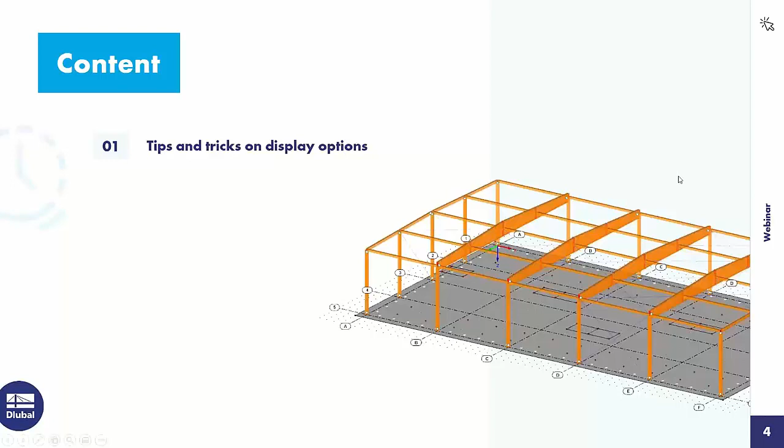To the agenda today: I will introduce some tips and tricks on display options, also on the printout report, and basic information. I will do a single and multiple print of graphics to the printout report. And I show how to create a verifiable printout report. We turn directly to the program.

In RFEM, that's a storage building made of timber and a reinforced concrete floor slab, with bracings from steel, as you can see around it. The model is completed and designed; the timber structure is designed, and also the concrete structure.

We can go through the load cases: self-weight with roof loads and single loads from racks, snow load, the imposed loads with loads from forklifts and from the racks, wind in X direction and Y direction, imperfections in X direction and Y direction, pre-stress, and then there are a lot of load combinations that are automatically created by the program.

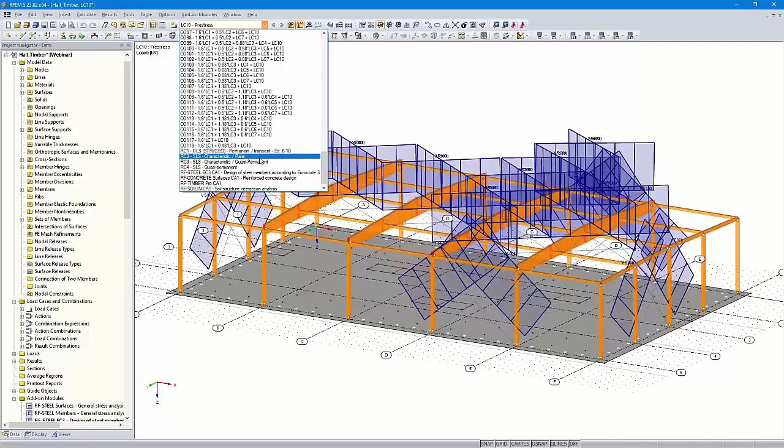Also four result combinations: one for the ultimate limit state design, three for the serviceability limit state design. Then the design of the steel structure, those are only the bracings. You can see a design ratio of 55%. Then the concrete results, also for the floor slab.

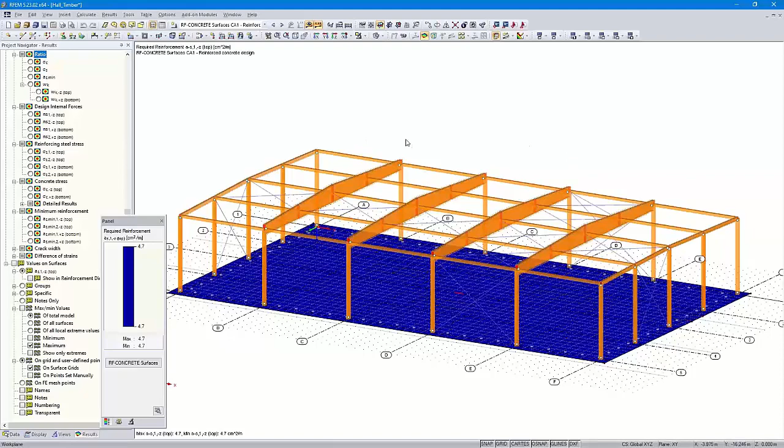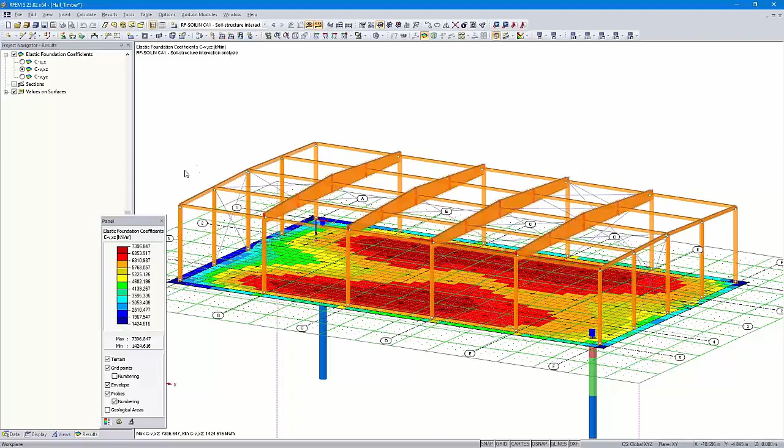Then the results of the timber design. Here you can see a design ratio of 94%. That's in the horizontal beam here, the maximum design ratio. Then I used RF-SOILIN to determine the elastic foundation coefficients. But we want to start with the member results. We want to print them in the printout report.

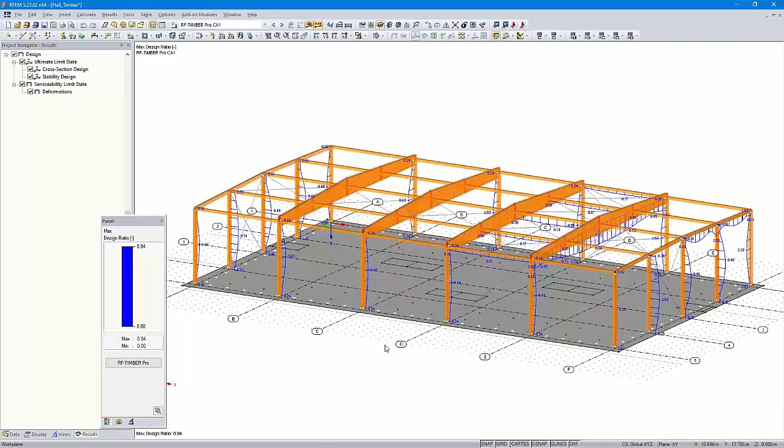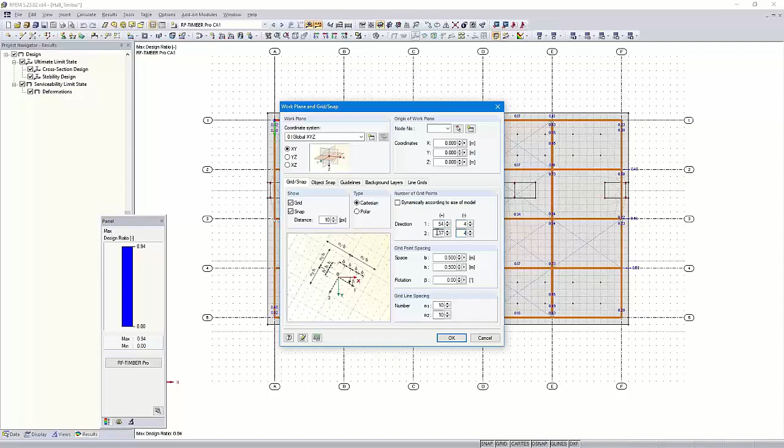But at first, I would like to move the axis designations closer to the model. I can show you how to do that in the side view. We go here with a right click in the grid options, edit. And here "dynamically according to size of model" is checked. We uncheck it and then I subtract 5. Okay, and then you can see the axis designations are closer to the model.

You can also hide the axis in the Display navigator under guide objects, and then you can uncheck the line grids and the axis would be hidden, but we would like to show them and document them.

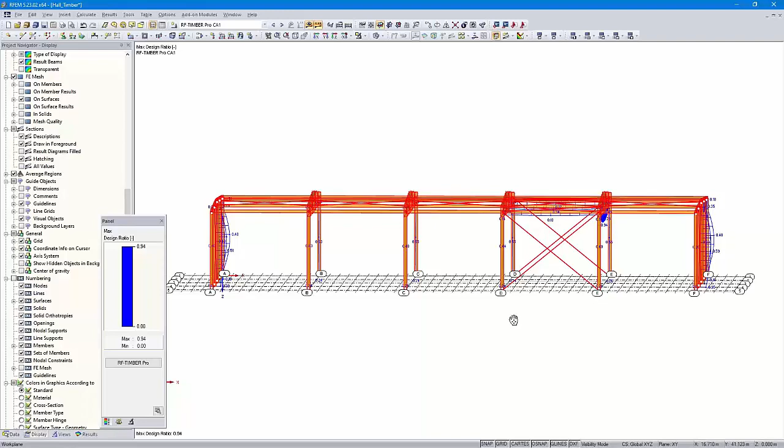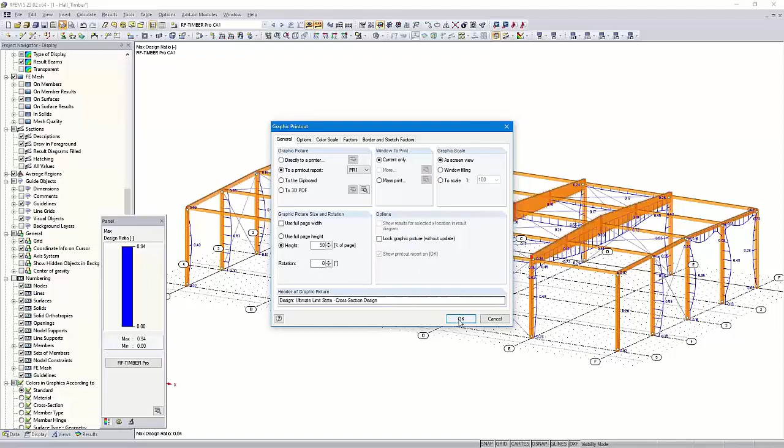Then I make only the timber structure and the steel structure visible with the option visibility by selected objects, and the concrete floor slab is hidden. Let's print that graphic in the printout report. Here above, print graphic to the printout report, the current one only as screen view, those are the options I will use. Then the height, 50% of the page, no rotation, and I confirm that.

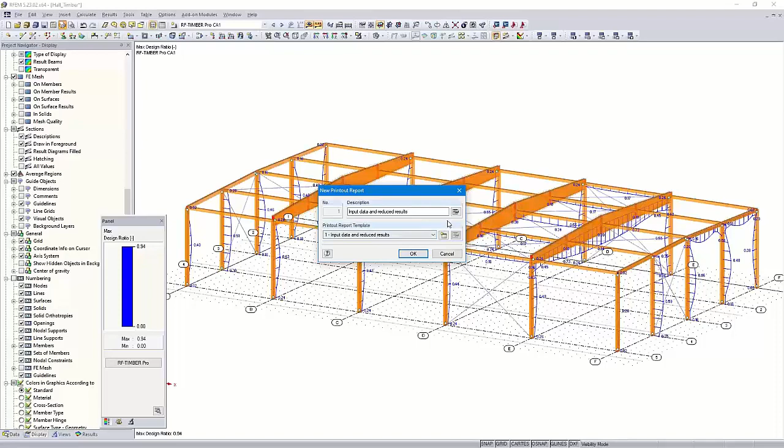Usually we would print the graphic with this option here for the printout report, input data and reduced results. But you can also use other options. In this case, I would like to disable a lot of pages because we want to print the graphics first in a protocol without so many pages, and therefore I disable the RFEM data and the RF-STEEL data. I leave the concrete and timber data because we would like to print graphics in those chapters.

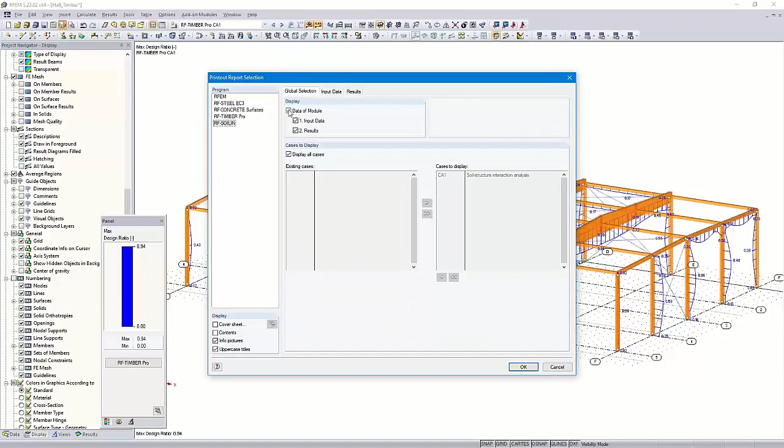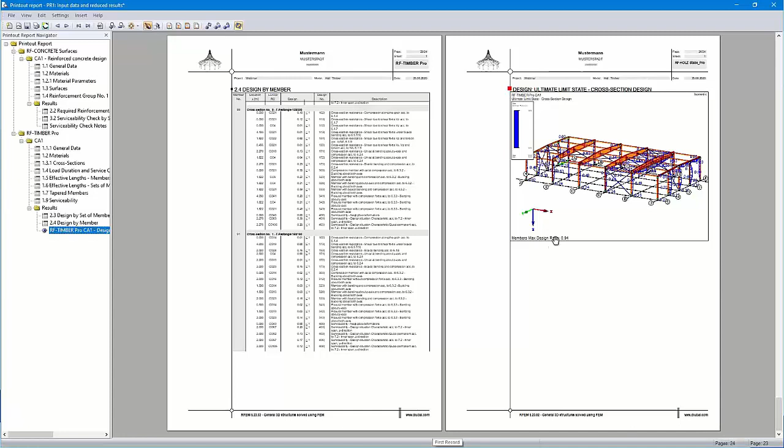So now a printout report with only a few pages is created. At the end, we will have more than 170 pages. Now there are only 24, and the handling of the graphics is much better.

We can see that graphic is quite confusing, but we can modify it afterwards. By right click, I can open the properties and rotate the graphic. First I use the full page height and rotate the graphic 90 degrees. Quite better, but I'm not satisfied with this graphic. I will change it here with right click and edit.

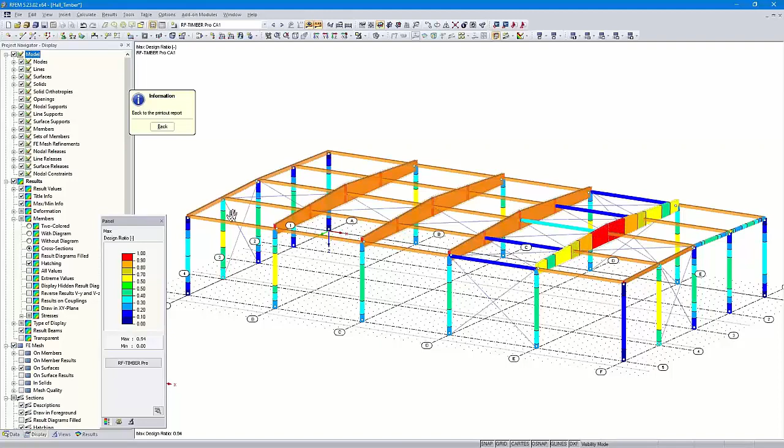I go back to RFEM, and then in the Display navigator under results, members, I can use the option two-colored, that's the current state. Then with diagram, it's colored here. Then without diagram, and cross-sections. I think that's a good overview. You can see the maximum design ratio is in the horizontal beam here, and I can go back to the printout report.

Okay, that graphic is much better. We will use it, and we would like to print that graphic of axis E separately in the printout report. We leave the printout report with saving that graphic.

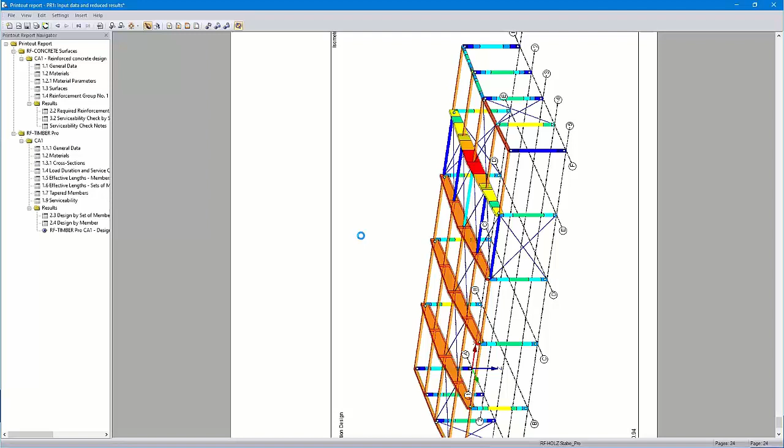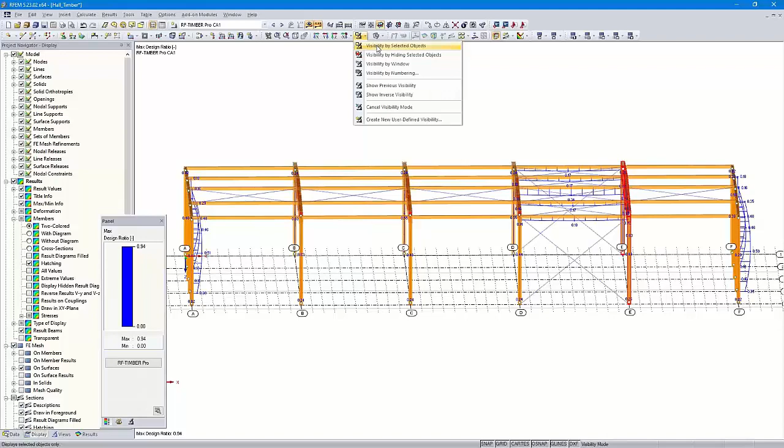Then I create a new visibility. I use this option here, same as when I click on the right mouse key, visibility by selected objects. I use the wireframe display mode, and we can create a view.

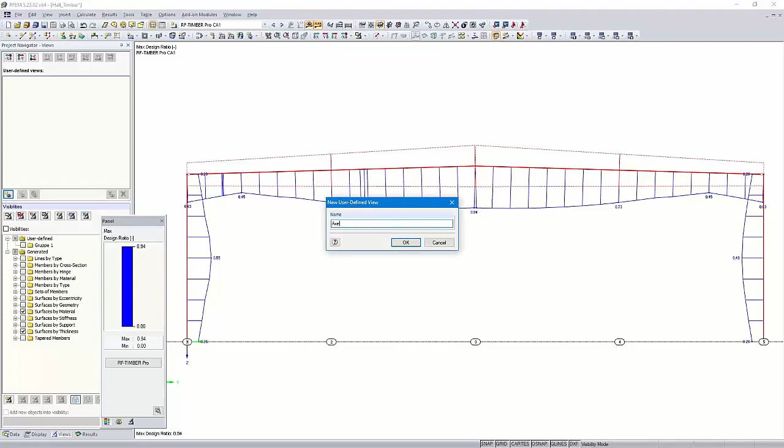For example, here, create a new user-defined view. I can call it axis E. You can go back easily later to this graphic. I'll show you: I cancel the visibility mode, for example this view, and I click here to axis E and come back to this graphic.

Okay, here you can see the 94% design ratio. We printed the graphic - that's quite easy now.

Now that graphic is created too. It's quite sufficient. I could make the panel smaller here with properties.

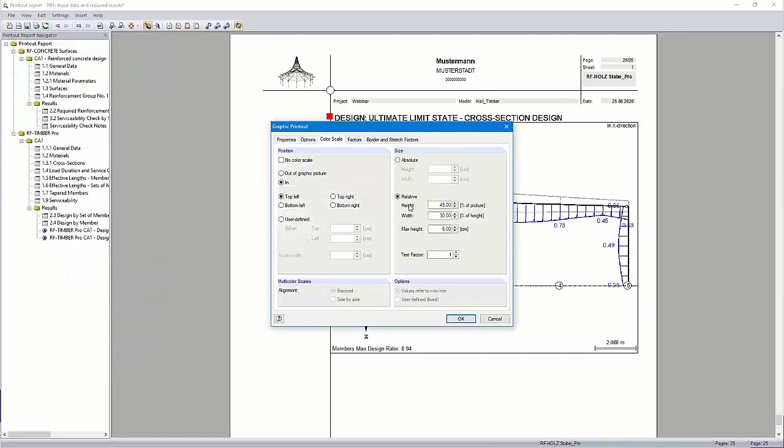I can use a color scale and width of 20 on 20%. Okay, that looks better. I could move that to the right side a little bit, but I won't. We leave the protocol with saving the graphics.

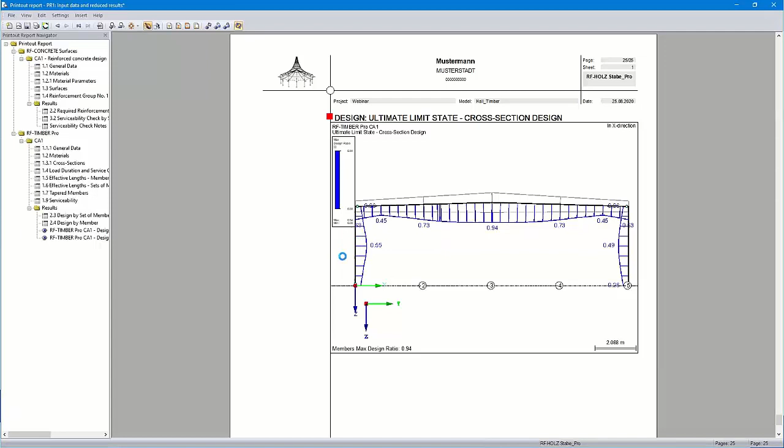And then we print the reinforcement results. I choose only the concrete floor slab in the view.

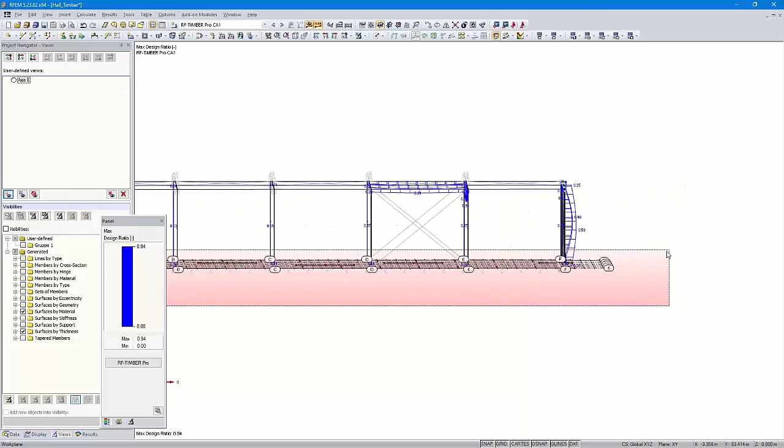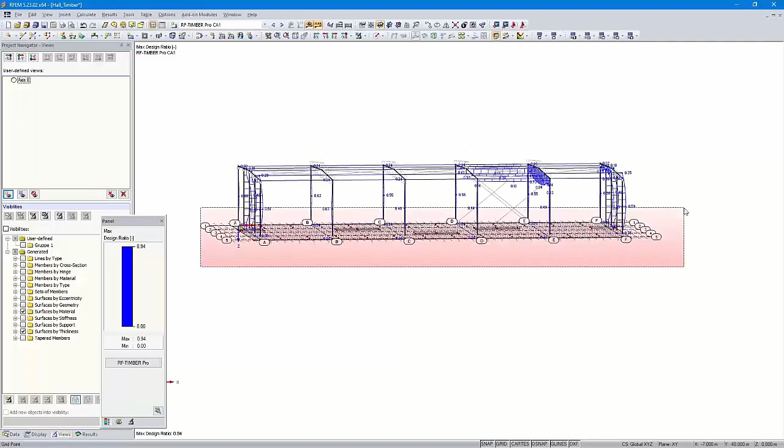Just a moment. A view in Z direction.

A small tip: when you zoom in and out in a graphic with the mouse wheel, you can see steps. If you want to zoom in and out without steps, you can press the Shift key and the middle mouse key, then move the mouse back and forward, and you can zoom in and out continuously. Okay, just a small tip.

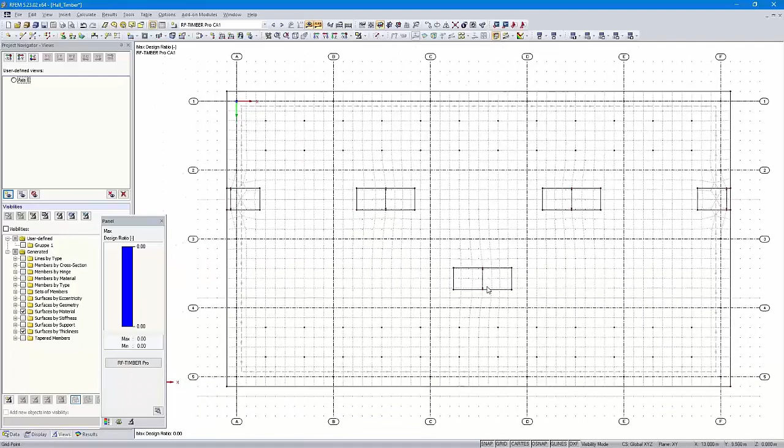Then we go to concrete surfaces and the results. Those are the right results, governing ultimate limit state and serviceability limit state. You can see there are almost the same values in the concrete floor slab because of the restrained design.

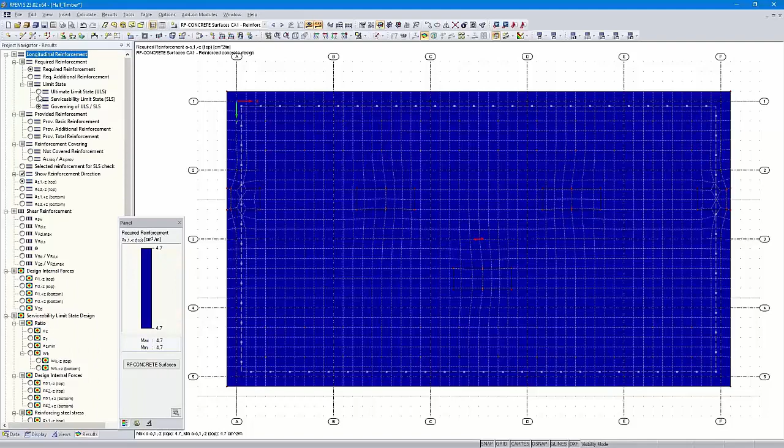I use in this webinar the graphic of the ultimate limit state design. This graphic has more different values. You can see here the values between 0 and 2.7, and 0 and 2.8. Those graphics are more informative.

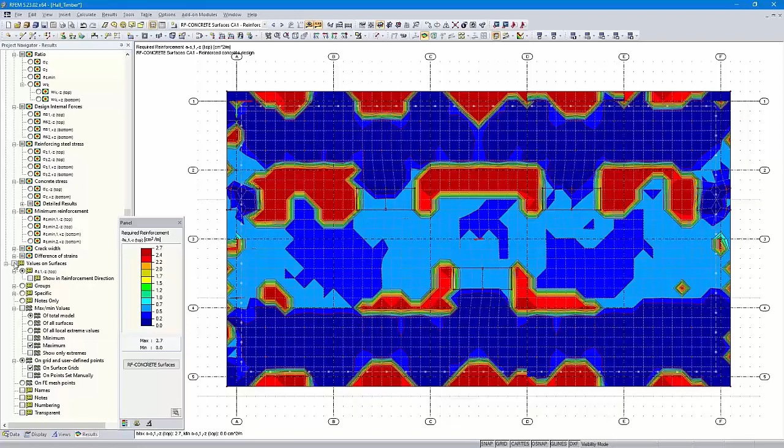Okay, I could print that graphic - that would be absolutely sufficient. But I would like to do a task that is more difficult: I would like to print a graphic with all values in all grid points. I check here values on surfaces, on grid and user-defined points.

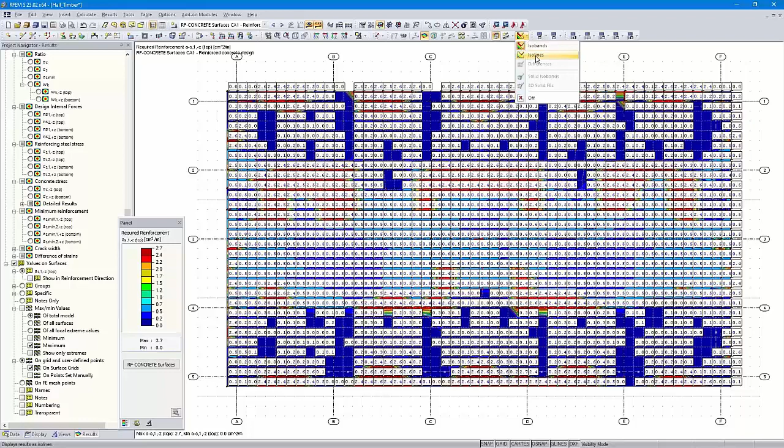And when I have got all values here, I can use not the isobands, but the isolines. Then I test the print - I print the graphic. I use the full page height and rotate it 90 degrees, and we will see how it looks.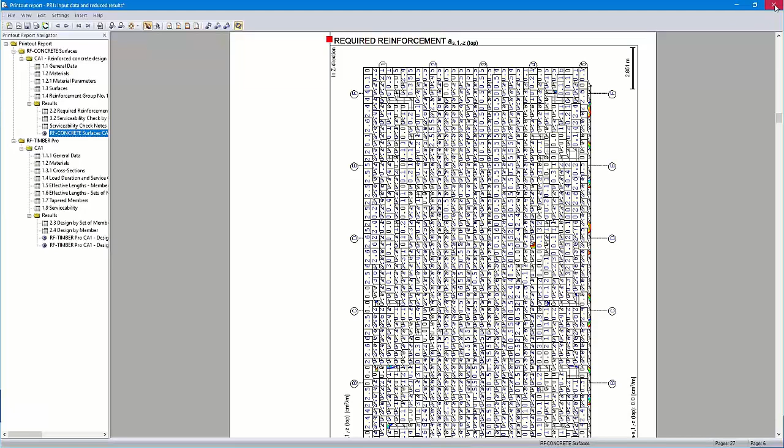Now we can see the values are too large. The graphic is quite confusing, and we leave the protocol without saving.

By right-clicking at one value, we can open the display properties, and we are at the right place here: result values on surfaces. We can change the settings here separately for the screen and the printout report, but we can also use identical settings for both. We change only the setting for the printout report.

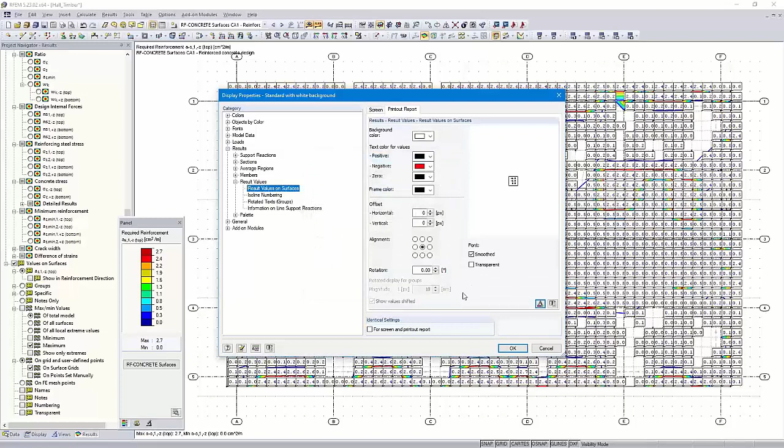I use the black color for the values here. Then I delete the arrow here, move the values to the middle of the grid point, and change the font size to 4. That's in German because my Windows is in German, but it doesn't matter. So, okay.

And then we print it again with the same settings. Just a moment, and then we will see that it looks much better now.

Yeah, now we can read all the values here. At least for a PDF print, it would be absolutely okay.

Then we leave the printout report, because I would like to show you a mass print only for 4 pages for the 2 directions here, and for the top and bottom, meaning the reinforcement. I go here to print again and choose mass print.

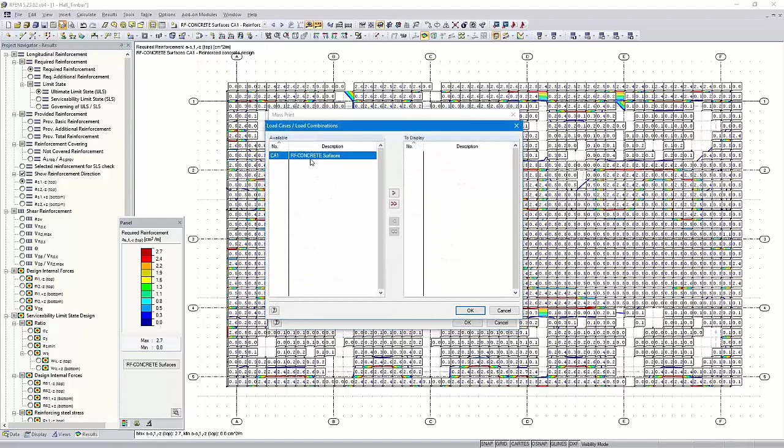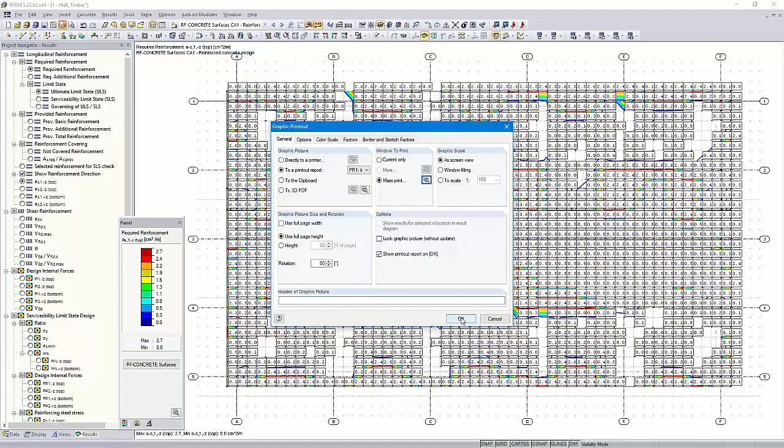I change the mass print settings and select the concrete surfaces, module data, choose ultimate limit state design and AS1, AS2 for the top and both for the bottom. I could also add other graphics, but for this example 4 pages or 4 graphics are sufficient. You can do the same way if you want to print more graphics.

The mass print works for member graphics or graphics with member results as well, but I would like to show you the function for the surface results. Okay, just a moment, and then all graphics are visible.

I click our graphics here. You can see it's okay.

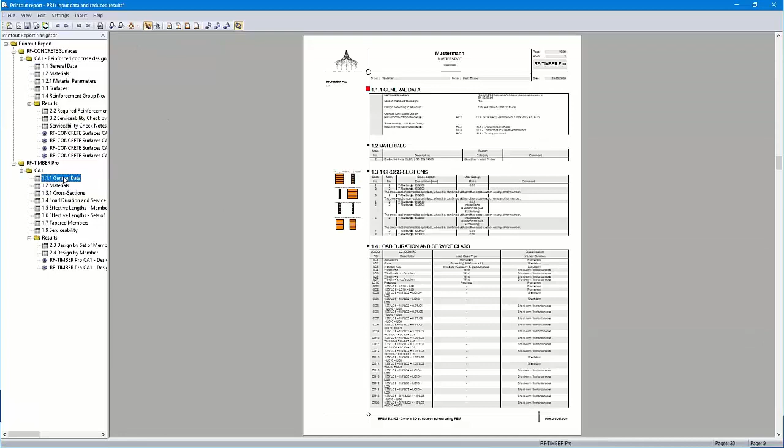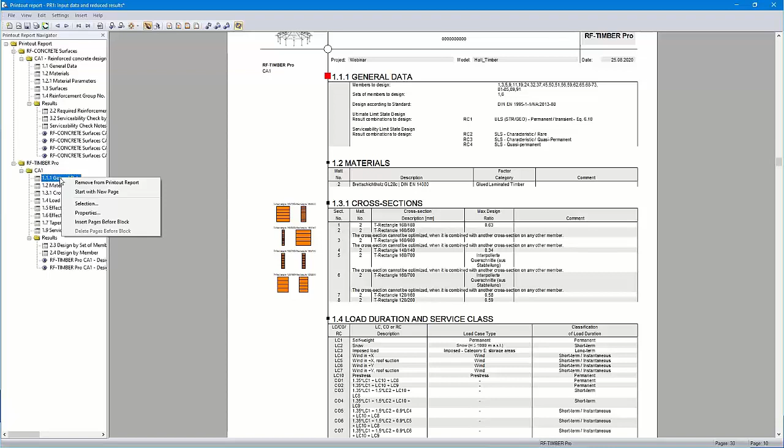Okay, a small tip. For example, if you want to add comments, etc., here in the left column, you can click with the right mouse, then properties, and you can add text. For example, design notes.

Just an example. Here you can see it. Just a small tip. Okay, then some basics.

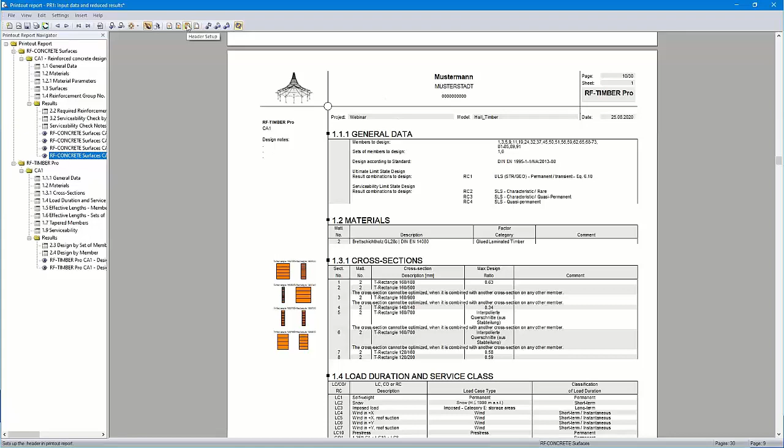For example, we can create a header by clicking here, header setup. We can open the library and create a new header. I already created a Dlubal header with the name of our company, the address, and the logo.

You can change the first number of the protocol, for example. Here in the settings, you can add prefixes, etc.

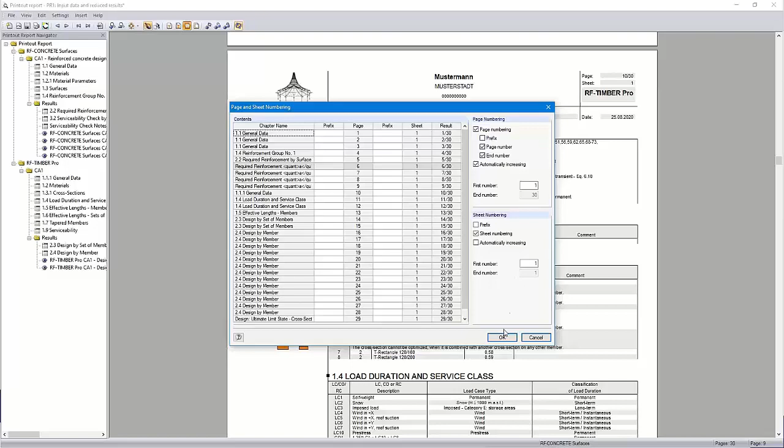So the header should be okay now. Yes, okay. Then we create a cover sheet, here with cover setup. You can also show the picture of the model automatically.

I can add some text here. I prepared the text, it's only fictive text. But we would like to do the printout report complete. Okay.

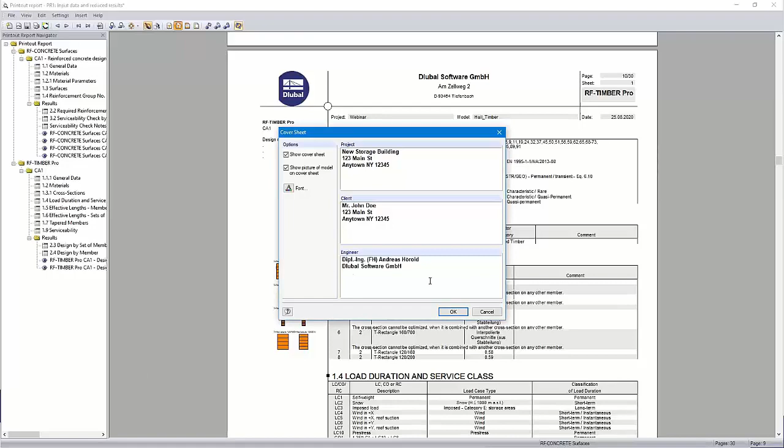That's the cover. Okay, you can see that takes not much time. We can go to the next point.

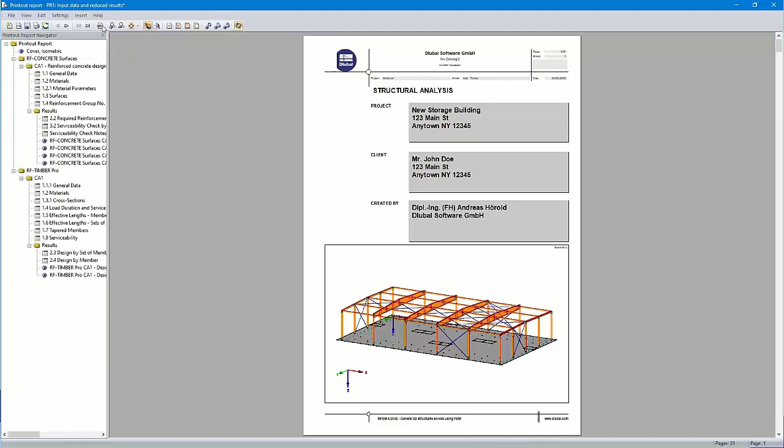You can insert text blocks, text files, images. Now I will add a text block, here the preliminary notes.

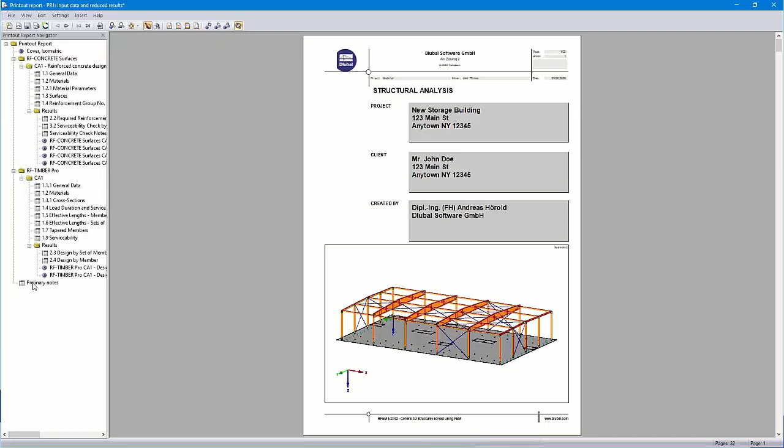I have prepared some dummy text. Only the first sentence is correct, the rest is dummy text. It will be added at the end of the protocol, but we can move that later to the right place.

I will add an image from the clipboard. I go to our website, and here under solutions you can find the online services, for example the GeoZone tool, cross-section properties, the glossary. I think some of you know that tool already. It's for free. We have a lot of international standards, also the Eurocode with the national annexes.

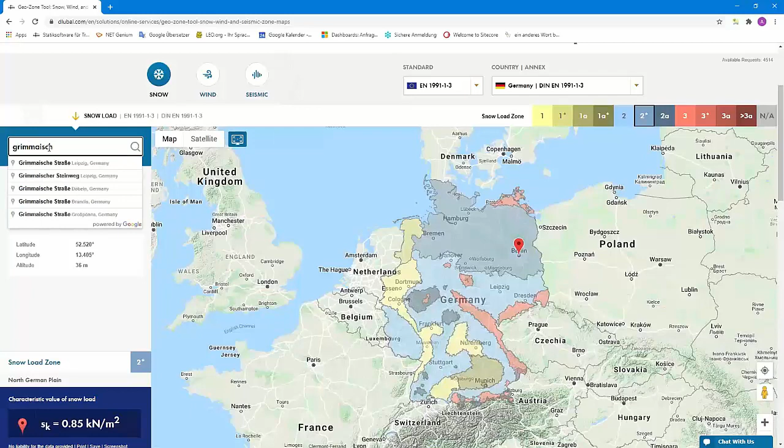I use Germany here. I entered the address of our office in Leipzig. Okay. And we can see here snow load zone 2 and the characteristic value of the snow load.

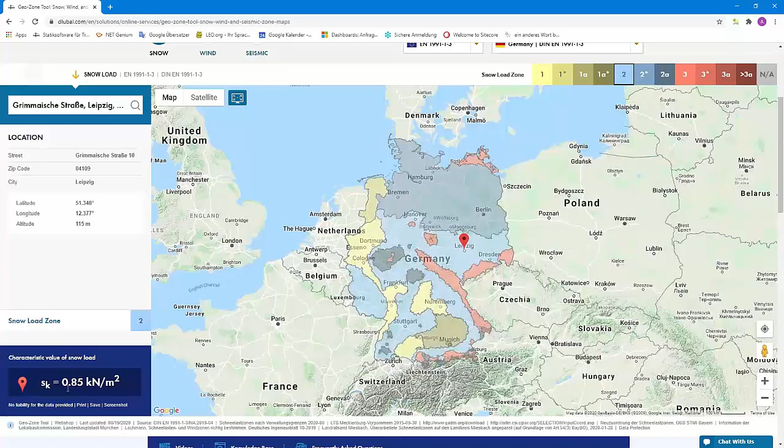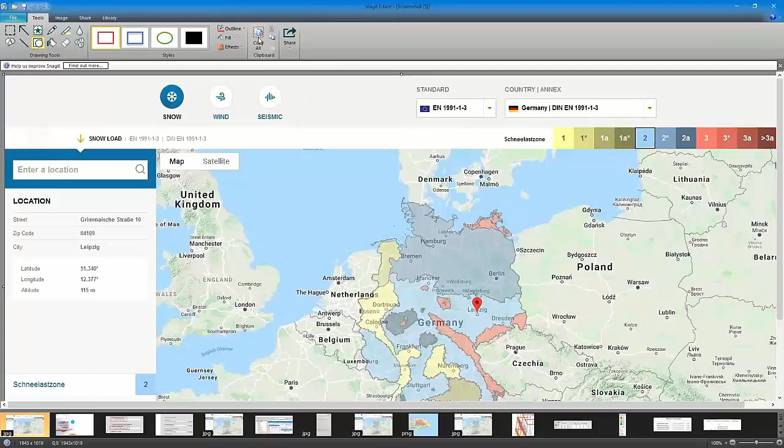And we can create a screenshot, then open it with an image tool. For me, that is Snagit. I can copy it to the clipboard and then insert it into the protocol.

I call it snow load zone. Okay, and you could do the same with the wind loads, earthquake load zones, and so on, and also other graphics. Okay, in the next step, or some other tip now again.

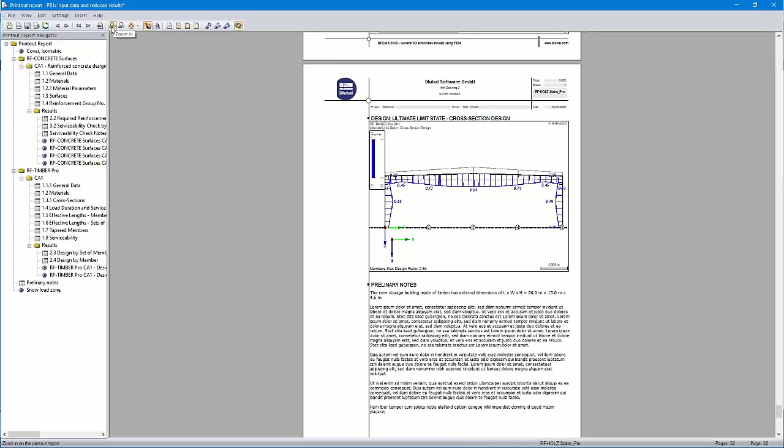You can add empty pages here.

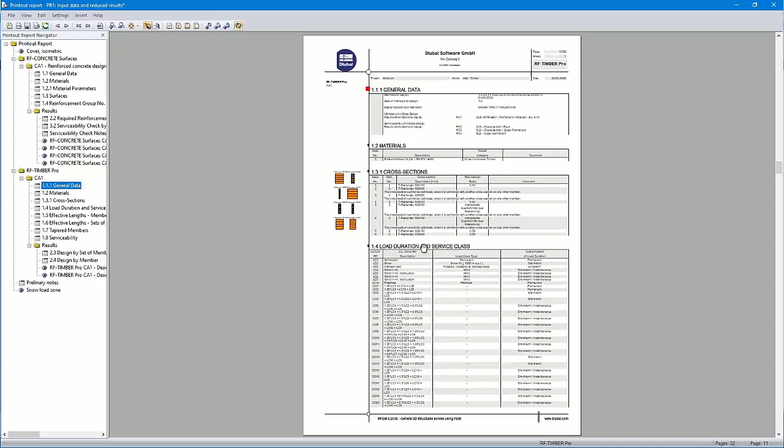For example, you would like to add pages from external programs, etc., in your protocol. And then you see here, that is page number 11.

And by right click I can insert pages before the block. I call it test, and 5 pages. Okay.

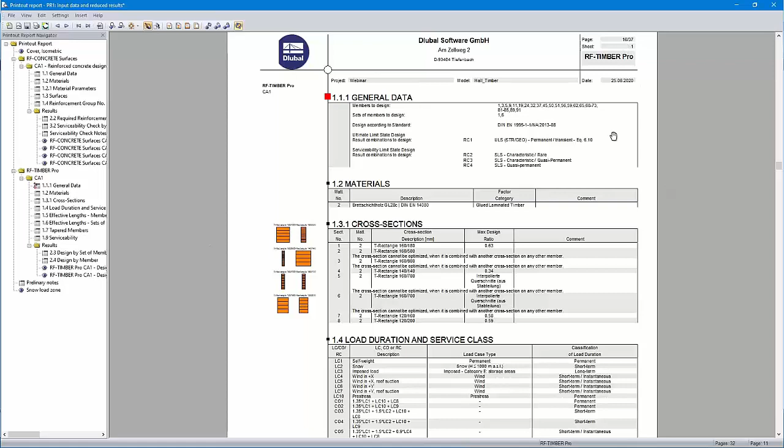And then you can see it's page 16, and this page is page 11. Oh, but I will delete them.

Okay, just for info. Now it's page 11 again. And the next step is to select the topics.

First I check contents here. We would like to show the content. Then the RFEM data, I choose them. The steel data, those are already in the protocol.

Okay, now you can use the settings which you like. Yeah, you can disable some content. For example, I will disable here the results of the load cases and load combinations.

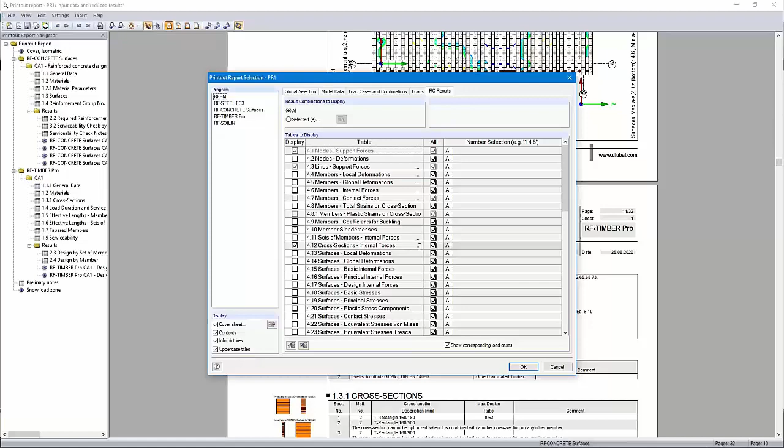And I use another setting for the cross-section internal forces. I choose here not the partition values, but the extreme values of the cross-sections. Okay.

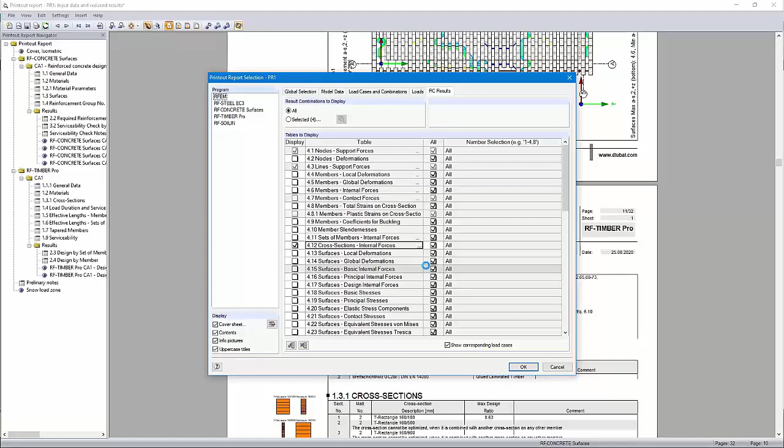Therefore, the protocol will not have too many pages. Okay, then the whole protocol is created in a few seconds.

So you can see all the module data. I moved the preliminary notes to the beginning.

Just a moment. You can see now we have 170 pages. So I move it behind the contents.

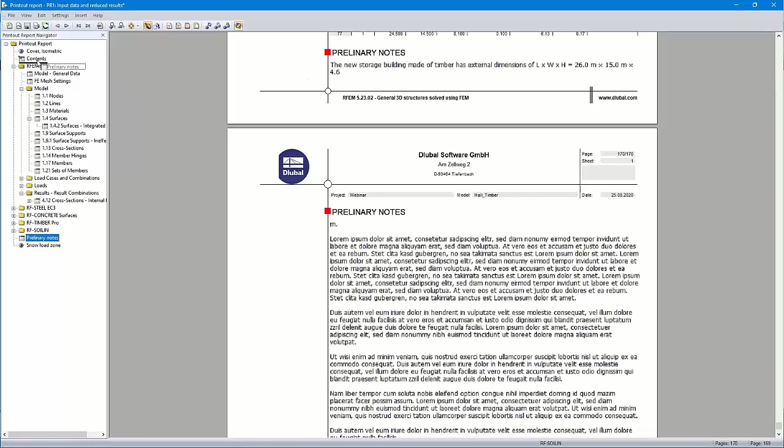Okay, now our pages will be renumbered. It takes some time. So, and I moved this load graphic here into that chapter. I have to wait some seconds. Okay.

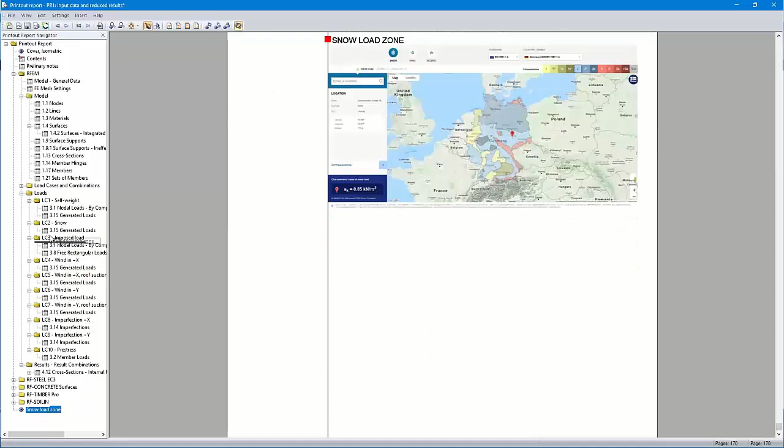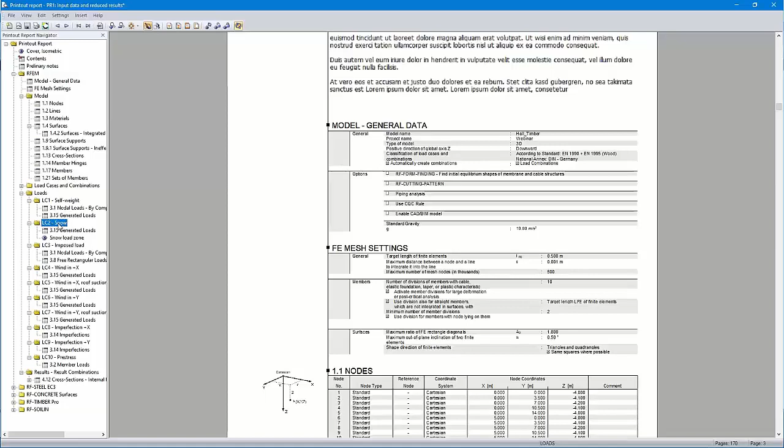So we jump to the preliminary notes. The cover sheet, the contents, preliminary notes, and the RFEM data are shown. Here, snow, the generated snow loads, and the graphic from the Dlubal homepage.

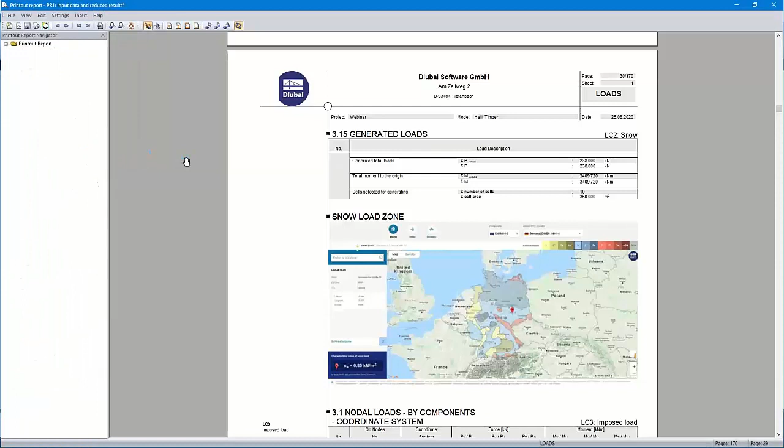It's possible to translate the protocol. There are 13 languages available: German, French, Italian, Russian, Chinese, etc. By clicking here to French, the whole protocol will be translated in a few seconds. You can see here the text is already in French.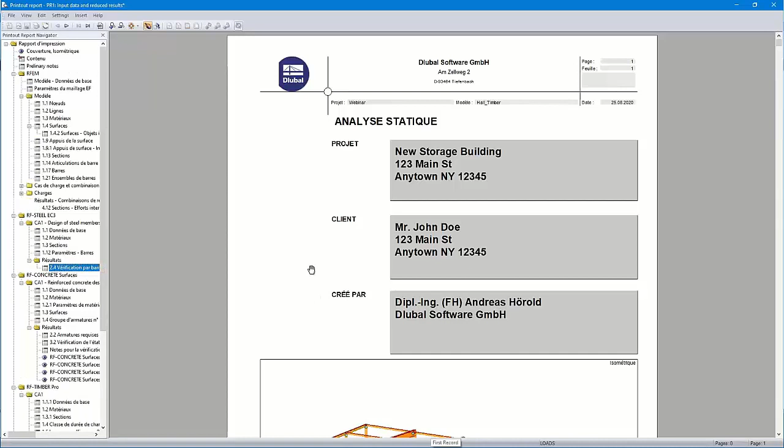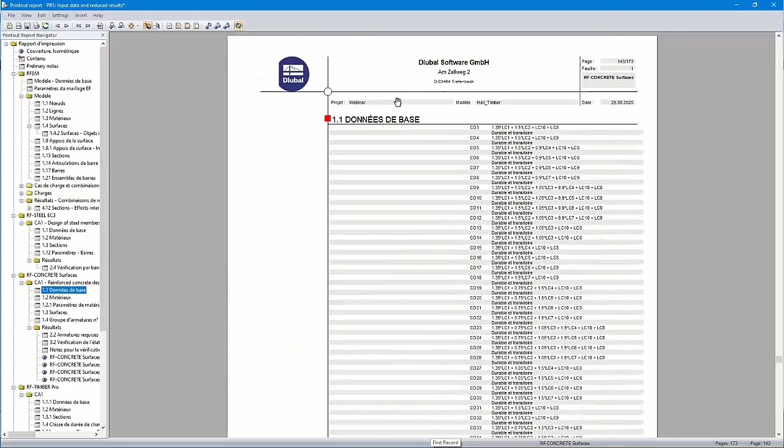Okay, we have to wait some seconds. I will show you some other parts. Here, the whole protocol is now in French. We translate it back. Okay, that will take some time.

You can export the printout report to VCmaster, for example. How to do that, I would like to show you with the help of a knowledge base article. Sandy Matula wrote this article, and she also did a short video where you can see how it works.

You can also print the printout report as a PDF, on my printer, for example. I can show you file, export to PDF, export to RTF - that's a text file. You can print it directly to a printer, also to a PDF printer.

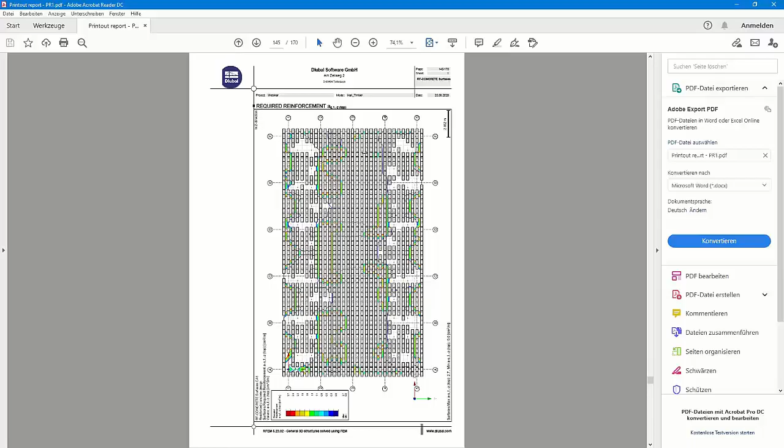I can start it, it would take some time. I cancel it and show you the complete report instead. That's the PDF, you can see the graphic here. It looks quite good. That's the whole printout report as a PDF file.

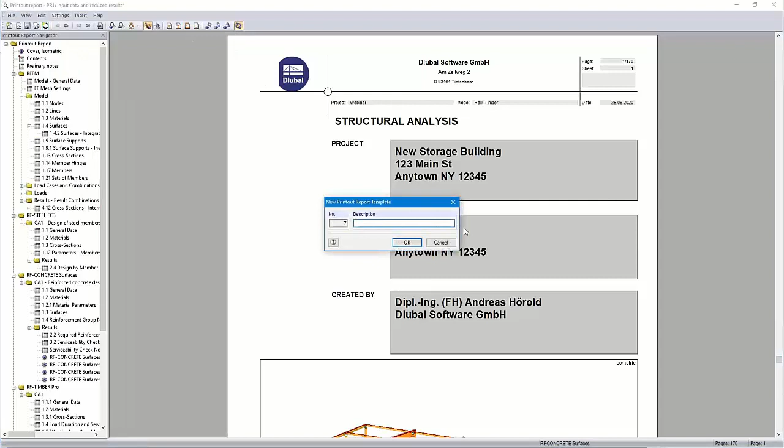Another tip: you can save printout report templates. For example, you can use those settings here for a new template. Then you need to choose new from current printout report, and then you can enter a name and save it. You can also save a new template. You can check and uncheck the chapters that you want to display.

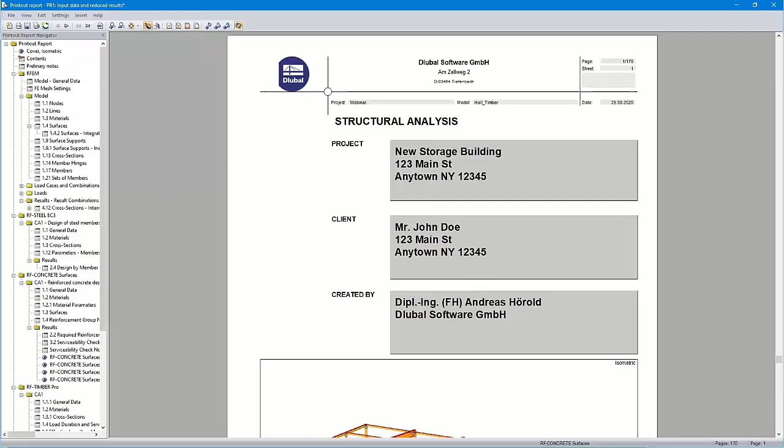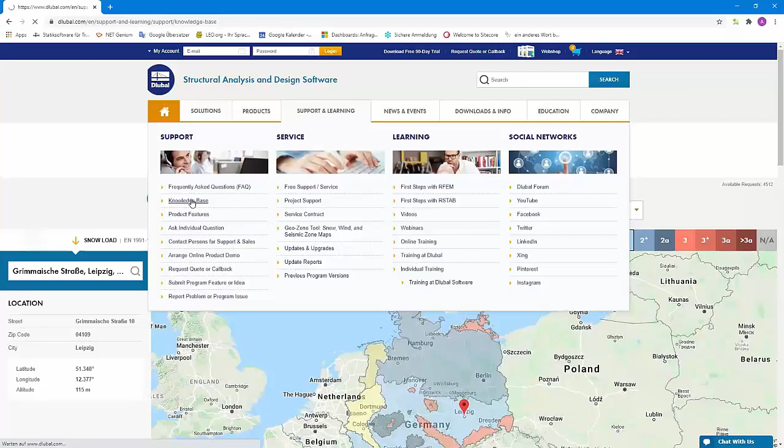As promised, I show you the article about VCmaster. Here under Support and Learning, you can find a lot of FAQs and knowledge base articles. I open the knowledge base database. You can see a lot of articles.

I use the full text search for VCmaster, I searched already in the text for it. Here are 3 articles. I will show you the article on export to VCmaster. Here's a short description, and you can see that Sandy wrote it. Maybe we can take a look at the video.

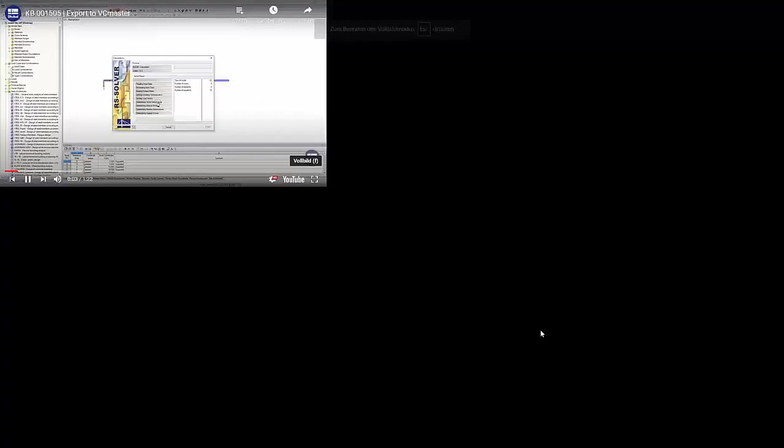An easy beam, a single-span beam with a cantilever, printed in the printout report as we did it in the webinar today. This simple example has only 4 pages.

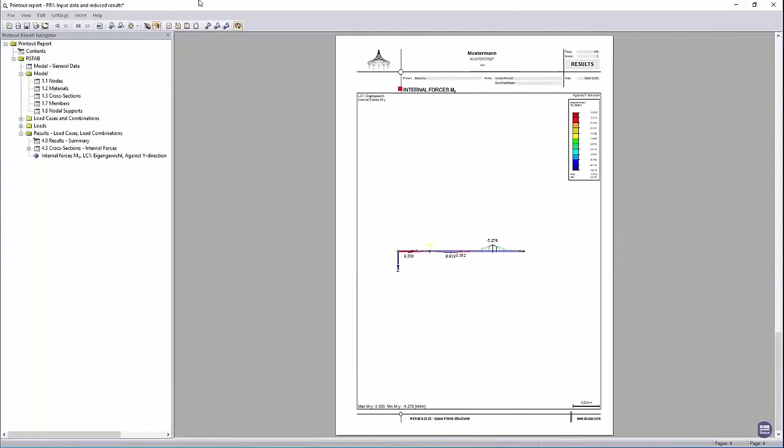Now with that graphic, VCmaster must be opened before you export anything from the printout report to VCmaster. Then you can click at the top to VCmaster, and then you can choose the pages that you want to export.

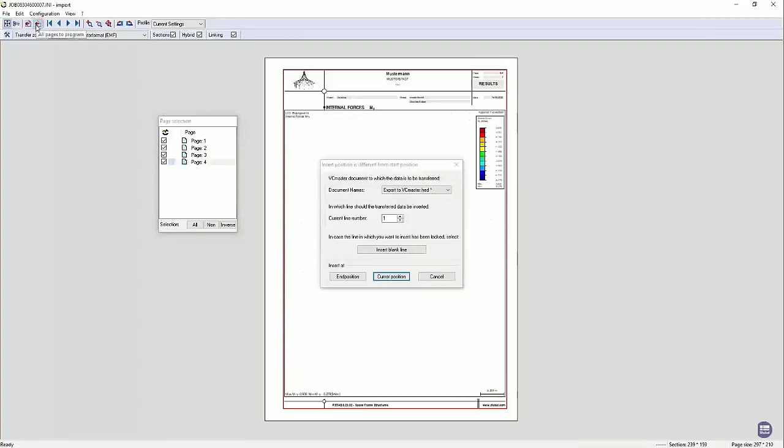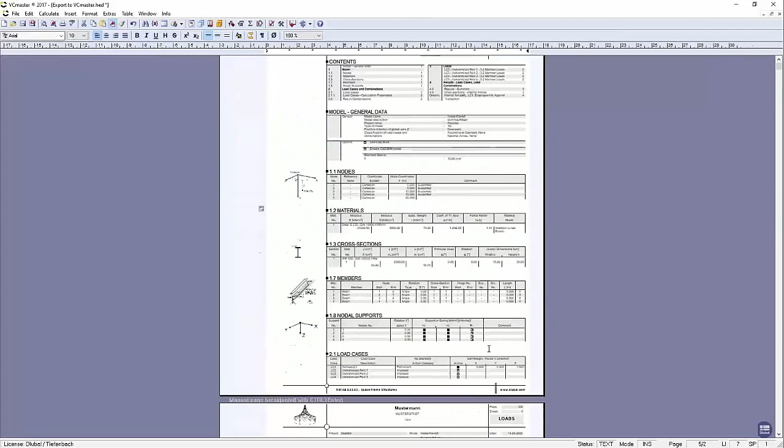This report has only 4 pages, and all pages are transferred in some seconds. You can also add to this VCmaster tool other printout reports, also from other programs. It's quite easy to handle. Just test it.

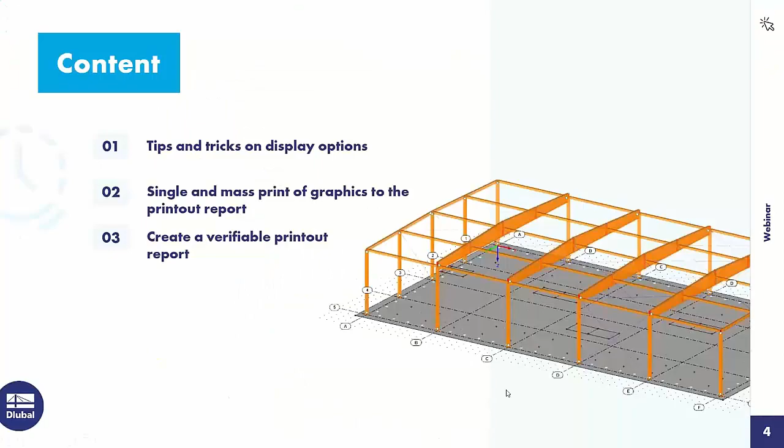Then I go back to the PowerPoint presentation. I would like to introduce you to some free online services. I already showed the Geo-Zone Tool with a lot of codes where you can determine the snow, wind, and seismic load zones, etc.

Then the cross-section properties tool - it's also a free online tool for standardized sections, and you can also define your own parameterized cross-sections and calculate the properties. I showed already also the FAQs and the knowledge base, a lot of valuable, informative stuff.

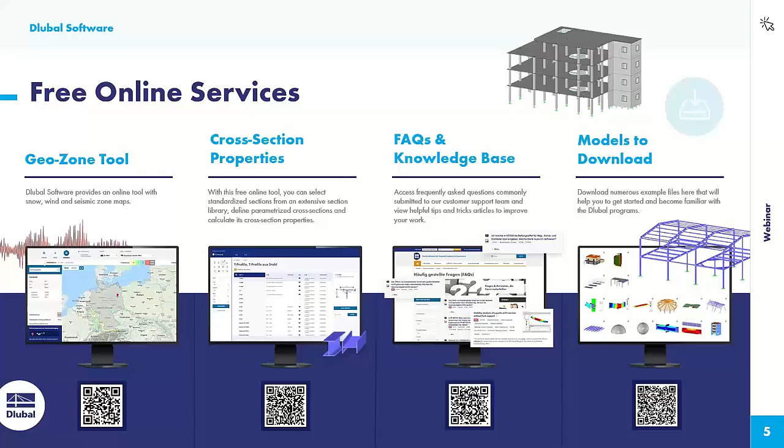Then you can download models from our website. The Dlubal engineers created them. You can find there also the model of today's webinar, and of our other webinars. Then there's our YouTube channel with webinars and videos, all for free, of course.

Then the web shop with prices - you can create your own offer as a PDF, configured by yourself. Then use our trial licenses for programs that you don't know, for example RWIND Simulation, SHAPE-THIN, SHAPE-MASSIVE, etc.